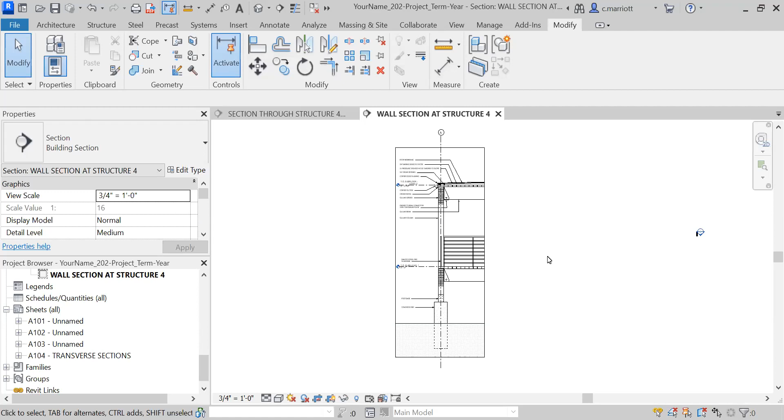In this final video for the section at structure number 4, you're just going to be adding some annotations and making a few adjustments with graphics. So I've already completed this, and I'll just try to give you some explanation about what was done.

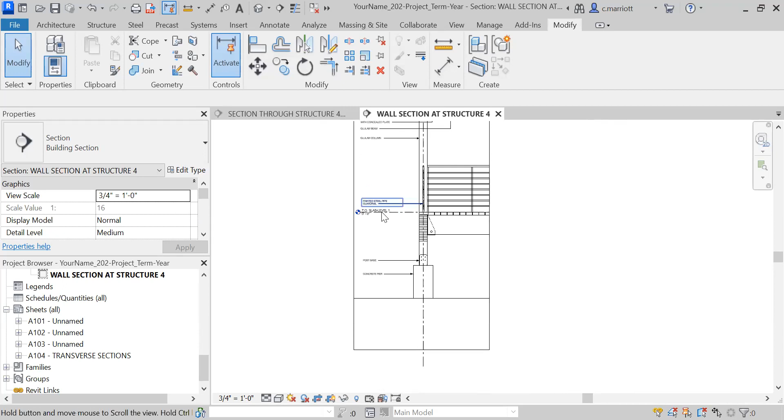I moved the levels over to the left side, and I'm trying to align them with text. These two are still showing. There were a couple that I hid. I hid those elements. One of them was the stair pad level, and the other one was level 0. Okay, so other things that I did, I changed the scale of this detail to 3/4 of an inch, so it's the same as the other wall sections.

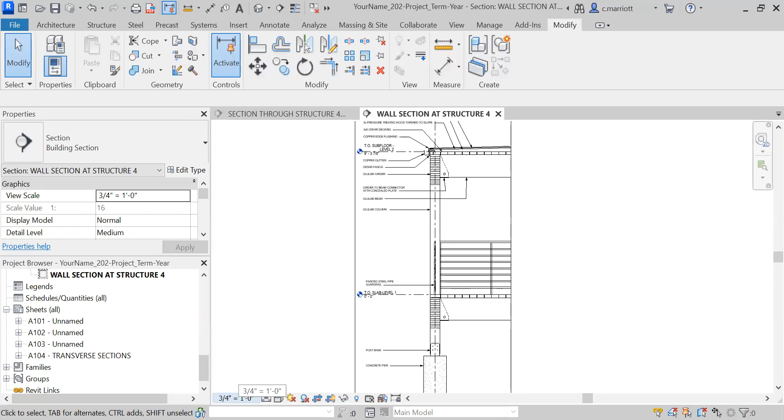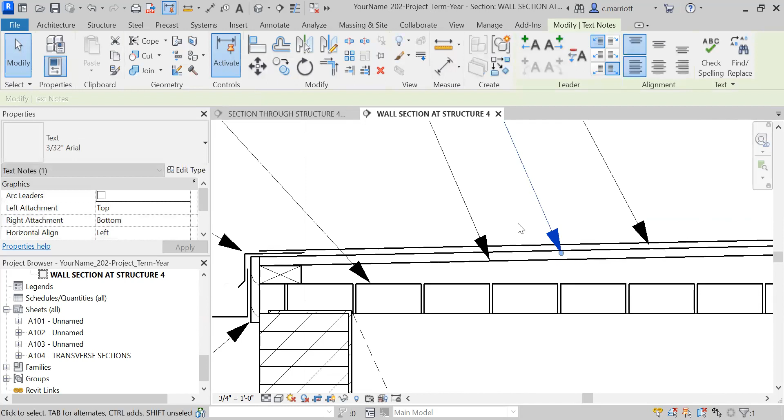Okay, and let's take a closer look at some of the notes. So we have a roof membrane here at the top, and again, always starting from the outside and working our way in. We have a layer of marine grade plywood, and I'm going to shift this arrowhead so it points to it. So because this structure doesn't have an enclosure that's conditioned, by conditioned I mean heated and cooled, it's not like a sealed building.

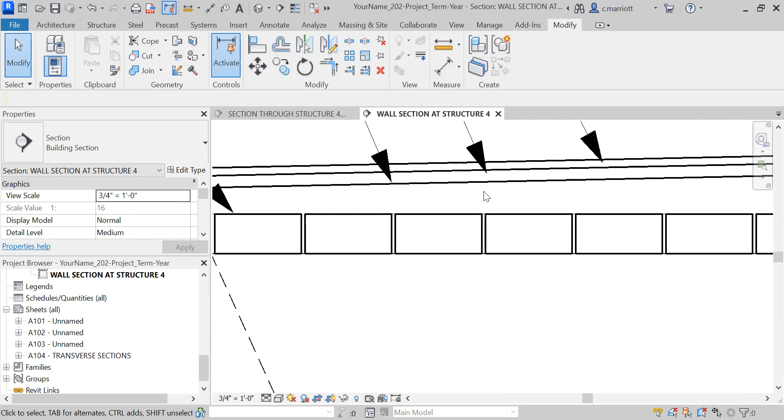The concern is that moisture will start to affect the wood that's exposed. For our decking here, if there are gaps in between them, there's no reason really to make this a sealed assembly, since the whole thing is outside. So to use a marine grade plywood just gives a little bit of extra assurance that the wood can withstand any moisture. All right, so that's one.

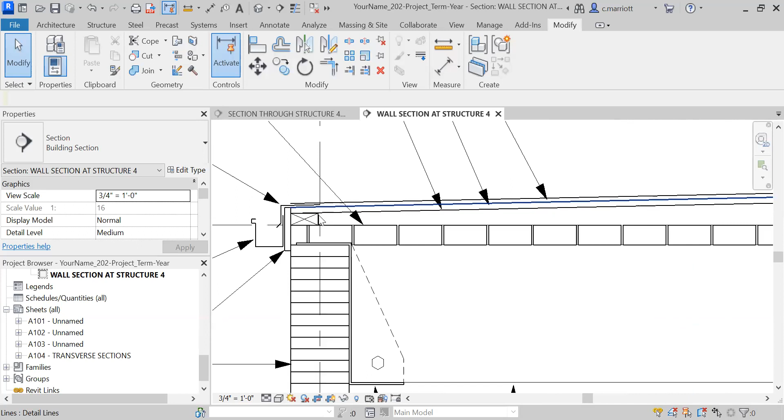2x pressure treated wood tapered to slope. So as we were building the roof assembly here, I mentioned that this part right here underneath our plywood layer is made out of 2x materials. I think 2x8s would have been sufficient to get the height that we need. But basically, they get cut down to form the slope, sloping down to a 1.5 inch 2x4 at the end here. And it should be pressure treated to help resist any kind of decay that would be associated with moisture. We have the 3x6 decking that had been drawn previously.

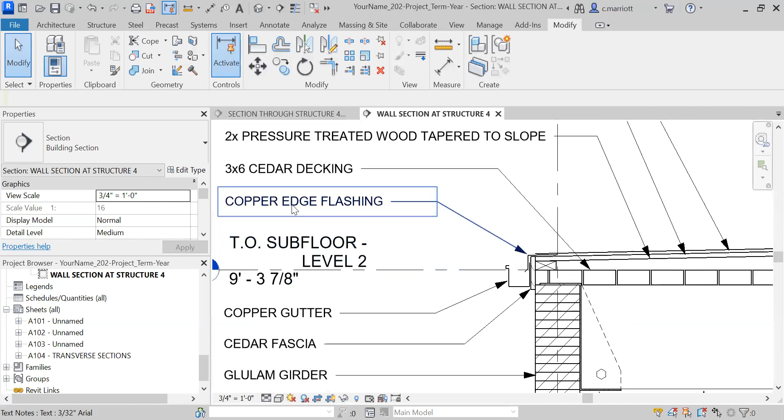We have a copper edge flashing. Now, this could be any number of metals. In the other sections, we used aluminum. The flashing and the gutter are copper in this particular detail. You could change that metal if you like, but just make sure that they're the same. Remember that you have to be a little careful when you put certain kinds of metal next to each other because they can cause some corrosion. So it's best to put like metals together in details like this, right?

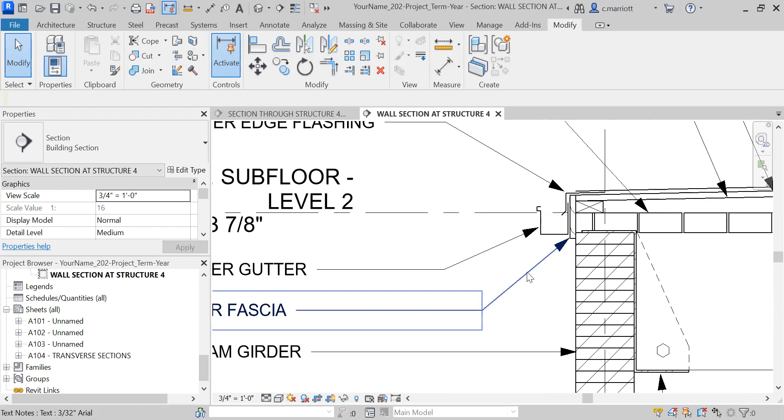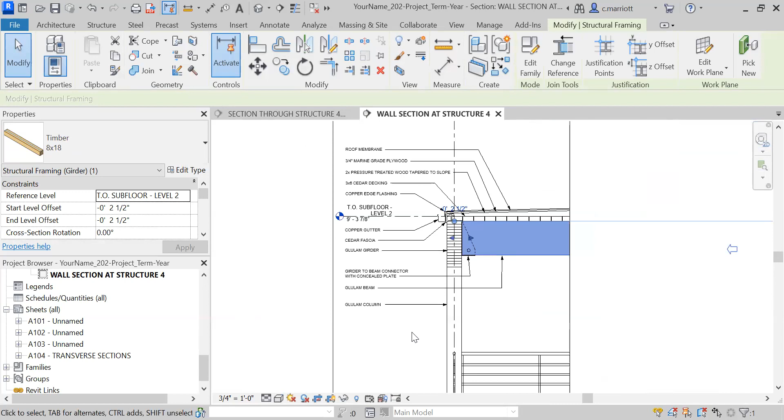We have a fascia board that we're using to attach some of these metal components. And that's going to be cedar because it is naturally decay resistant. You don't need to pressure treat it or paint it. It could be just left exposed. And for the structure, this is a glulam structure. We have girders here. We have a beam here that's also a glulam, and we have the columns that are glulams.

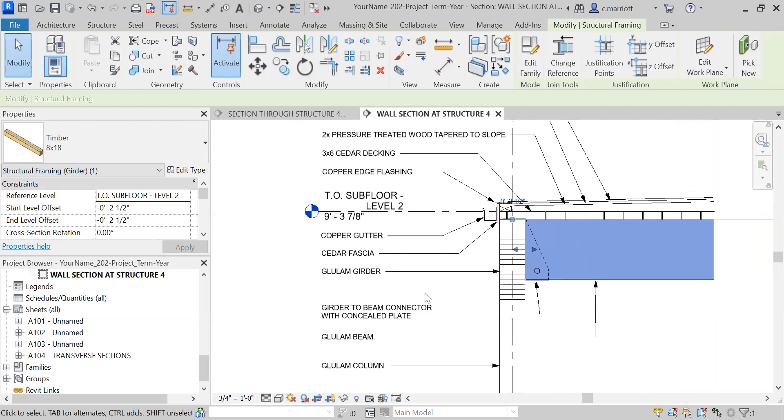Moving down, one of the last things that we drew was the connector. So just calling that out, girder to beam connector with concealed plate. Remember, this dashed line indicates that there's a plate inside the member, and the hidden line is what we use to illustrate that. Okay, moving down a little bit further, just to call out the painted steel pipe guardrail that wraps around the pavilion. We have a post base, and we have our concrete pier.

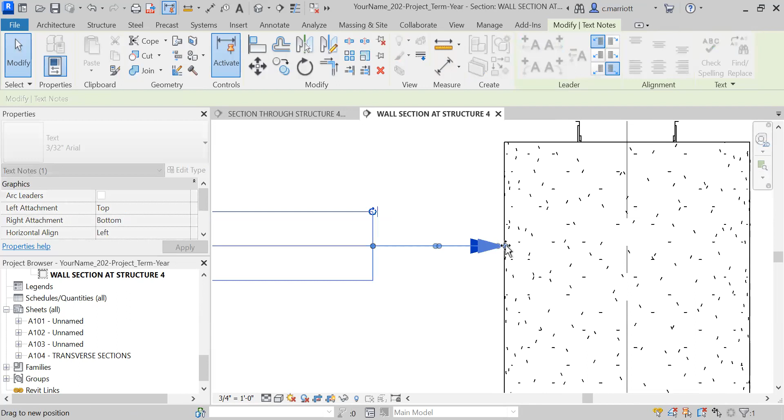So let me bring these arrowheads just a little bit closer, so they're pointing to the item, okay? And as we changed that setting before, we should see the hidden line of the pier through the earth tone. Okay? That's it for this portion of the assignment.